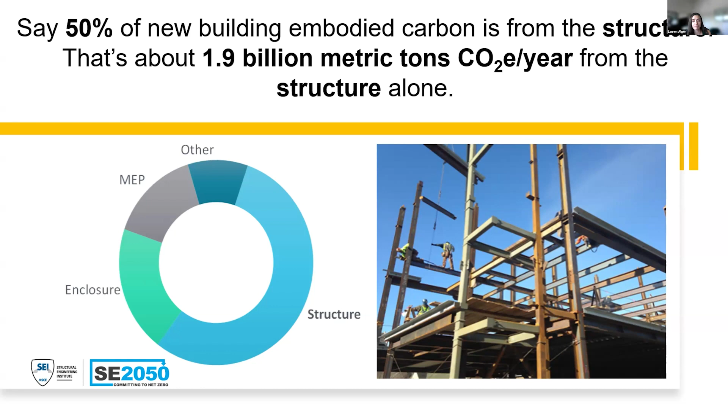So we do know that the structure is a significant part of the embodied carbon of the building. And that also leaves the question open about other infrastructure systems. So bridges, tunnels, roadways, really understanding the emissions associated with that across each of the different life cycles. So A1 to A3, A4, A5, and B1 to B5 on the end stages.

We also know that America's infrastructure on the ASCE report card is a C-. And I think this is really important. There was a statistic from the United Nations that mentioned about 3/4 of the infrastructure we expect to have built by 2050 has yet to be built. So really interesting to see how much work has yet to be done, the current rating or grade of our infrastructure. So just kind of jarring to think about how much embodied emissions we will anticipate emitting in the next 26 years. So this is really where Infrastructure 2050 was born.

So it is following right in the footsteps of SE 2050. We closely work with their team, and it's just the pledge in a different light from buildings, where the pledge is to work with infrastructure professionals to understand, reduce, and ultimately work to eliminate embodied carbon. A little bit of the difference is that it's not only structural engineers. There's so many stakeholders that are involved in this process, whether it's the clients, research institutions, industry organizations.

And while we're trying to follow as best in the footsteps of SE 2050, we're also kind of taking a different angle and expanding that circle, which is really exciting. Because there's so many different focus areas, right? It's not solely a building structural system. So it could be a bridge, a tunnel, a roadway, a highway, aviation, ports, transmission and distribution systems. So a lot of different systems to start thinking about.

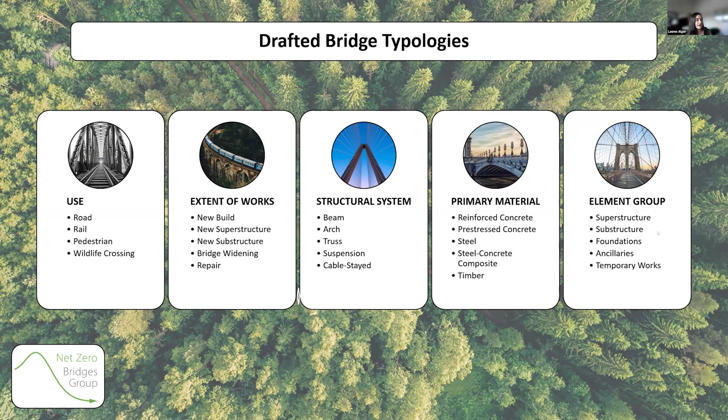So what we can reflect on, again, really great resource from the Net Zero Bridges group based in the UK. They have this typology of different categories of how we can start compartmentalizing different components of bridge systems, whether it's by use, the extent of works, if it's a new build or a bridge widening, maybe it's the structural system, the beam, truss bridge. All of these are very important to think about, the primary materials. And like Dan mentioned, the foundations is key. So that's another one.

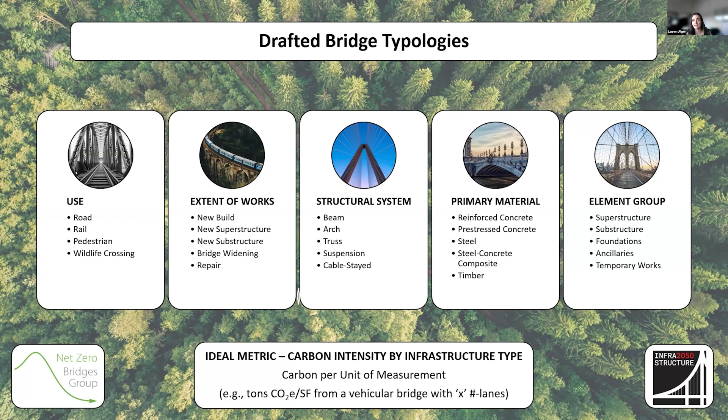Now, the question that comes up is when we're thinking about buildings, it's that global warming potential intensity. So for infrastructure or for bridges specifically, is it per square foot of the area of the roadway? You know, we got to classify if it's a vehicular bridge, how many lanes does it have? How do we want to start comparing apples to apples of different bridge types?

Overall, this is the vision that SE 2050 has, and this is some of the really great work that they're doing as well. So they're basically saying the red on top would show whether it's a school or different types of buildings, a hospital, residential. And we have the very same vision for Infrastructure 2050. So is it a truss bridge, a tied arch bridge, a cable stayed bridge, all different infrastructure systems, ultimately working towards the goal that Dan's team is also doing similarly.

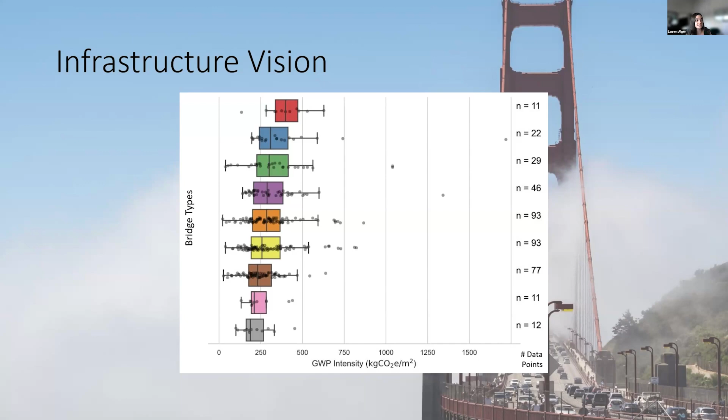That's the global warming potential intensity, right? So eventually, can we draw some line in the sand that says to the industry, here's that recommendation of what you realistically can be under. And the more data that we do collect, the more advantageous it will be to help promote that and drive effective policies.

So ultimately, there's a very wide variety of infrastructure types. It could be bridges, tunnels, right? But ultimately, we really want our group to be this centralized infrastructure knowledge hub. And that will drive environmentally conscious design decisions that will help spearhead effective policies. We can really standardize that methodology for carbon and infrastructure systems and establish those baselines and targets.

And in a future version, we really want to be able to require users to follow some standardized methodology to help calculate emissions. So the point Dan was making, in a consistent manner across the industry. That's key. And if we work together, this will radically accelerate that process. We're also hoping to require users to benchmark their projects against these industry baselines once we do understand what the responsible recommended baseline would look like.

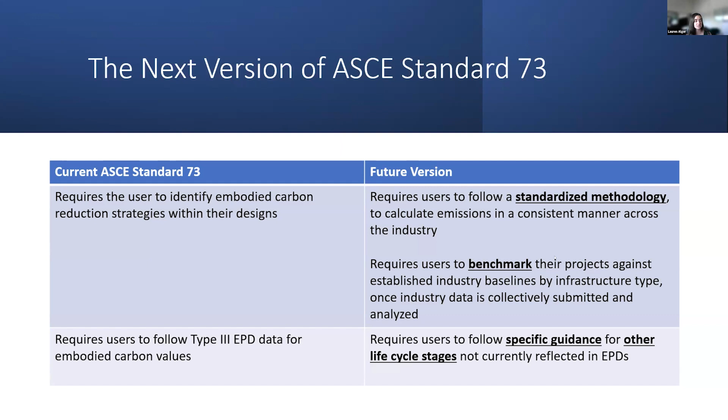Also, they are requiring users to follow Type 3 EPD data, which is fantastic. We know this. But there are a number of other life cycle stages that we do want to think about. And so we're wondering if we can require users to follow specific guidance for those stages beyond A1 to A3.

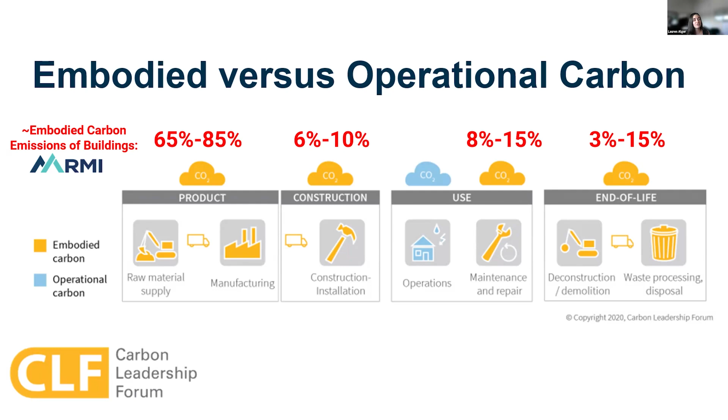But the question that we have with infrastructure is, what is that actual footprint in the other life cycle stages? How is this broken apart? Should we really be looking at operations and maintenance more closely, especially for systems like bridges? Maybe a tunnel has less operations and maintenance in terms of the structure itself. If it's like an underground roadway, maybe this is supposed to be watertight, so it really shouldn't have as high of an embodied emissions footprint for B1 to B5. So really trying to understand where the heavy impacts are happening.

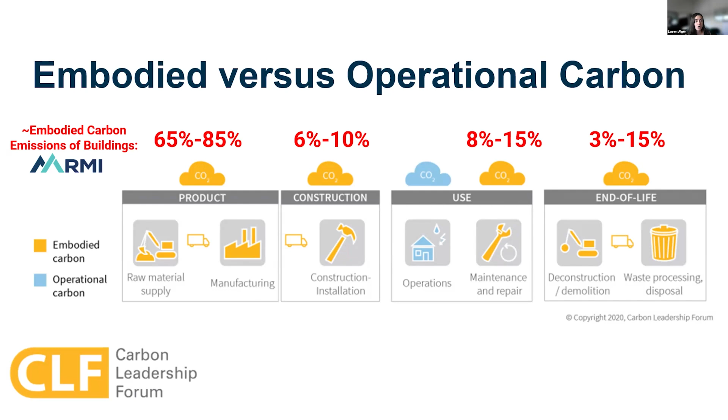So we know that concrete, steel, asphalt, glass, these are high emitting materials, but the precast industry, we frequently hear that it's behind in terms of getting the EPD data. So with precast liner, we're experiencing similar issues. What is the EPD for this precast tunnel liner? Because a lot of times you might have to just do calculations based on your quantity estimates in order to understand the concrete, the rebar, but is there an EPD for the assembly itself?

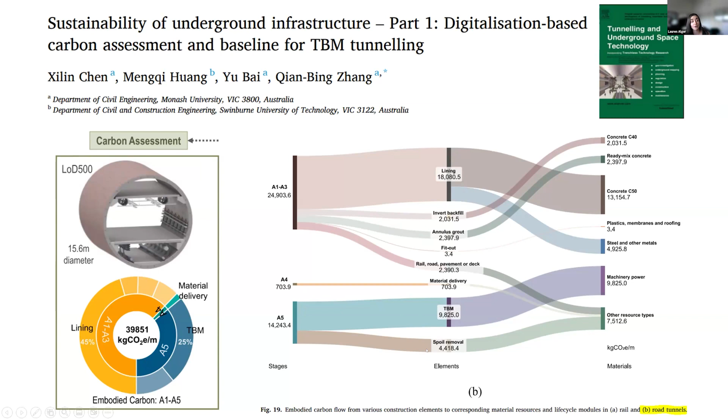Again, I really appreciate this case study. They make it very clear about what data goes into these calculations. So I'm always curious, how many people joining these calls have done not only the analysis of embodied carbon, but have actually done the calculations, because it is very time consuming.

You're trying to determine your baseline scenario. Then you have to move to your actual design targeted reduction scenario. And then you have the construction phase where you're trying to track actual emissions associated with that. So lots of different stages, lots of data needed, lots of emissions factors, trying to figure out which one's the right one. And this really paints a very clear picture of all the different data that you might want to start thinking about when doing an embodied carbon analysis.

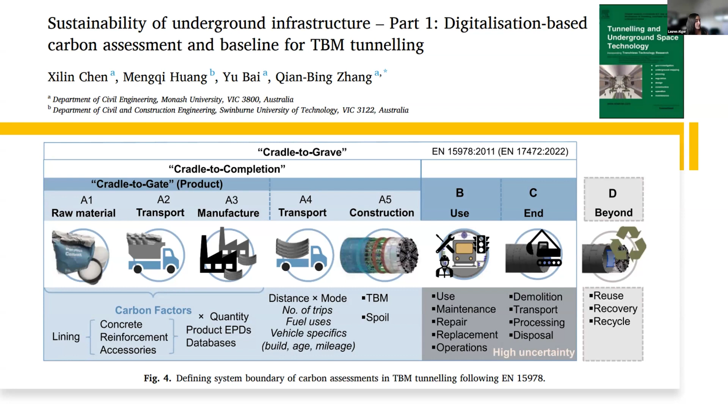So this is just kind of summarizing that. And I think it's really important to highlight one of the stakeholders being cost estimator. So if you're at your firm and you're trying to start doing embodied carbon analyses, make sure you're connecting with the cost estimators: the material quantities, the equipment estimates, the fuel usage estimates, right? These are all really valuable pieces of data that you might already have in a really streamlined manner to start analyzing. So it's really important that we start connecting with that stakeholder as well. It's not only the designers.

Material production, this is GWP from your EPDs, reasonably straightforward. And then you start thinking about your transportation to site. You have multiple materials, maybe from a single vendor, trying to figure out how you're creating the methodology to calculate A4. Thinking about A5, again, construction equipment, what data do you have available? What can you start calculating and how are you going to put that together?

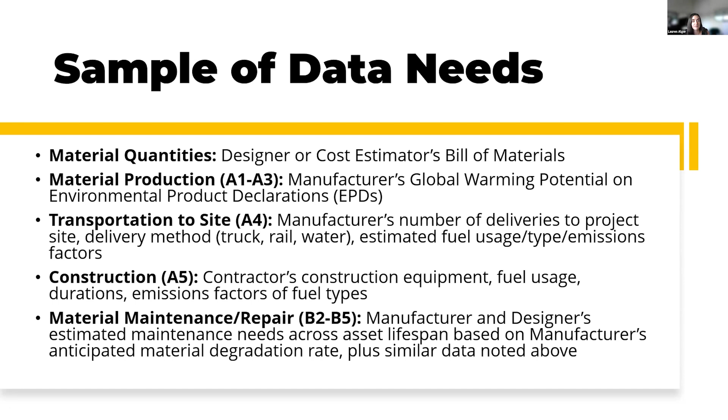And then the maintenance and repair. So this one, are you thinking about the lifetime of your asset? If it's 100, 120 years, and maybe a specific material has a lifespan of 50 years or something, what amount of materials will it take to repair and replace that system? And how many times does that happen over the lifespan of that asset? This is a very complex calculation that we have to start providing more clarity to the industry to help them understand how to perform this and rapidly accelerate these calculations.

So I know we're coming up to less than 20 minutes right now. I think it would be really helpful to kind of have this open forum discussion with the group. I have some questions that immediately come to mind, but some of the areas where we're seeing opportunities with Infrastructure 2050 are significant areas with researchers, right? So, how we can start analyzing system designs. What's that optimal balance between a resilient system that's durable and considering climate projections, and also considering low carbon systems, right? How are we working towards global warming potential intensity baselines by infrastructure type?

Materials, low carbon grout, those precast tunnel liners, this is huge. We see the industry gap. How can we help accelerate that? Buy Clean policies, we know some states have them for concrete or steel or asphalt, some of them don't have concrete. So how are we identifying the gaps in policies and understanding the amount of materials used in each of those states, or the projected amount of materials needed for the next 26 years, and really tackling those heavy emitting areas. Again, these are just to try and get everyone inspired about what we can start talking about in this open forum.

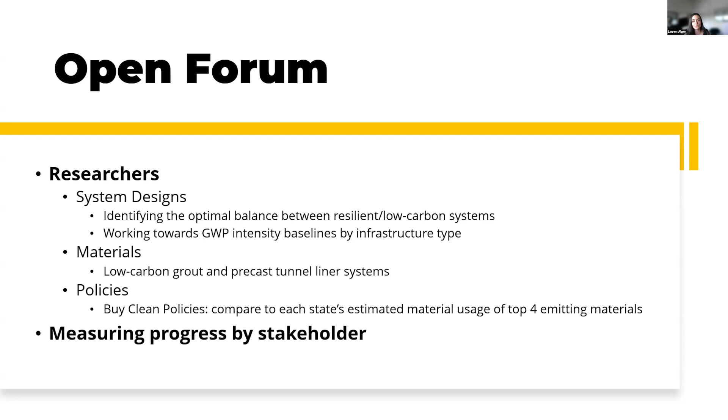There's also questions about measuring progress by stakeholder. So as an initiative, again, there's so many stakeholders. You have the policies at the top, which then inform the agencies. The client can really be making a lot of decisions, but sometimes that is based on cost. So what do we need to do as an industry with all of the other associated stakeholders to more radically advance this?

Engineering software, I'm thinking about modeling. How can the tools that we use be upgraded to make sure that more access is provided to just simply connect EPD databases to our modeling tools? How can we work with the cost estimators? So lots of questions focused on cost estimators, but also equipment manufacturers. What do you do with a fleet that you have, maybe a full diesel fleet, and you're starting to think about these targets, and how do you transition?

So maybe we can just learn a little bit more about what you see as some of the gaps. It sounds like you mentioned the foundation system being critical. What recommendations might you have for the industry to help accelerate towards these global warming potential intensity thresholds?